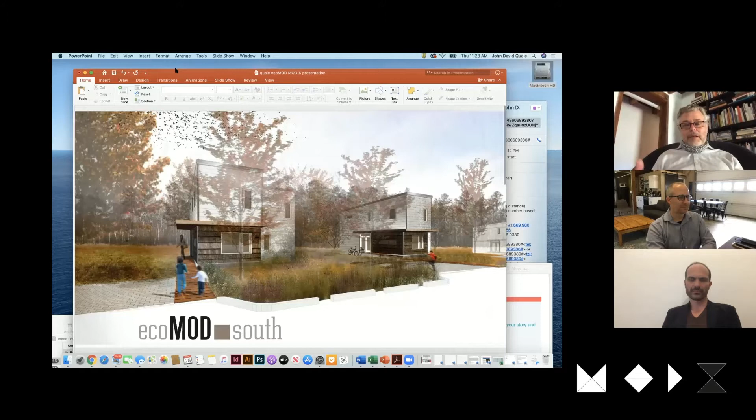We also did a project where we were focusing on taking that EcoMod 4 home and adapting it to 2 different locations. Those were the renderings - that's what the houses looked like when I last saw them right before I moved to New Mexico. It won one of those awards in Architect Magazine, and we thought that's great. There's some interior views real quick.

The main thing is that we really focused on airflow and ventilation, trying to address that this is the southern part of Virginia where it's a lot more humid. It was difficult to do some of that analysis because at the same time we wanted the house to be exactly the same as the one up in the mountains.

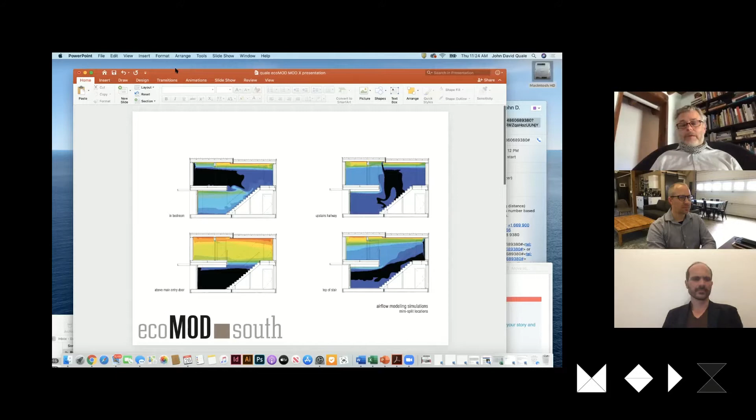So we got a passive house consultant to work with us on that, and she did a fantastic job. We were able to make it work - it involved the window placements more than anything else. Here's some examples that came out of that analysis, showing how she had to turn the buildings in slightly different ways so it was possible to meet Passive House Standard.

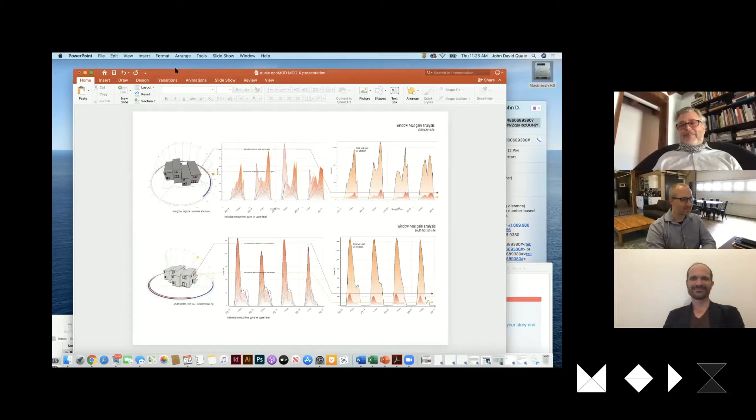Not only did we get the Passive House Standard, but that consultant also got an award for the rigor of her analysis from PHIUS, the Passive House Standard group in the US. She had worked for the guy who started the Passive House Standard in Germany - she was a grad student there, and she's great. I still stay in touch with her. Real quick, this is us doing those homes that were multiples.

The 3 homes, 2 passive house, and 1 just basic standard construction. We had intensive meetings—when you're doing modular, it's not easy to do Passive House Standard, and this team took it on. When I first got involved, I thought there's no way these guys are going to know what they're doing. But they totally got it, understood it completely. That's another learning opportunity for me. I always felt that's what I want to be doing at all times, learning something new.

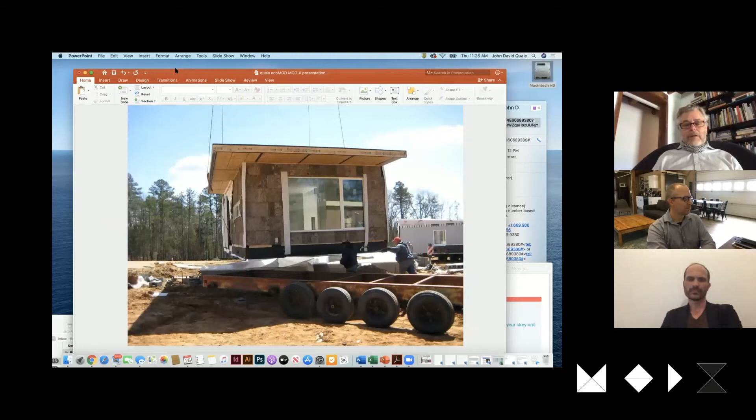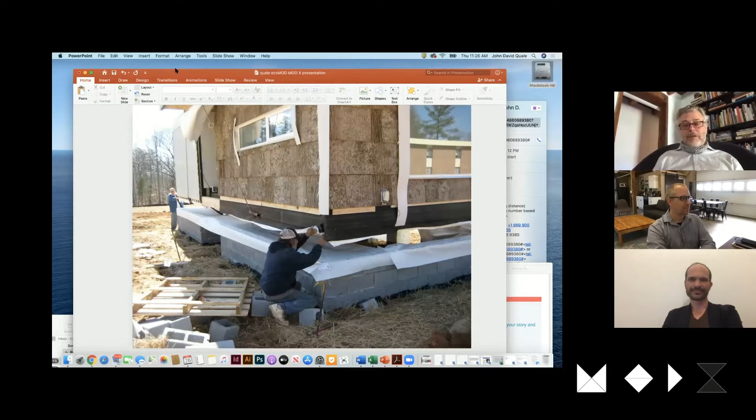There they are going on the trailer, being placed down. This was the most complex moment—that thing was hanging in the air a foot off the foundation because of little odd things that kept happening as we tried to put it down, because of the Passive House Standard. It ended up being a good thing though. We got some poplar bark as part of the facade of the building.

Everything had to be fully accessible, meaning it was 2 stories, but there was a fully accessible bedroom on the lower level. We had to increase the size of that home from the earlier version of it.

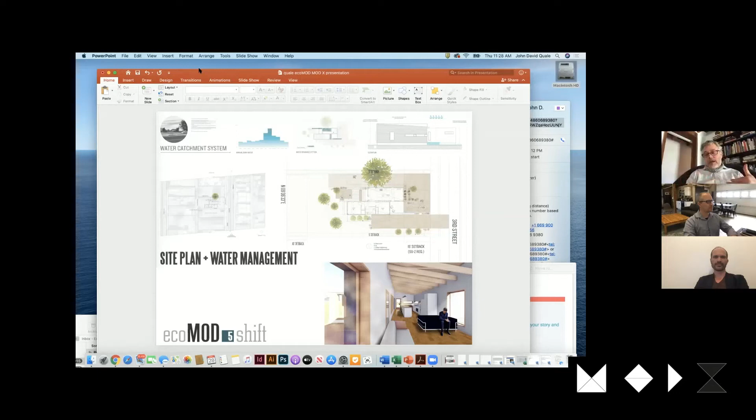The main focus was on water management and the site, because the weather is actually pretty extreme here—like I said earlier, high elevation and all of that. We tried to get as many breezes as we could through the building, and we were also collecting water on the roof in a diagonal line across it. That's what that weird structure up there is for—it forms this folded roof to take the water diagonally to the far corner.

The last one that was completed is EcoMod Rise. This was with the local community college—we ended up working with them because they had great building trades. But they didn't treat us very well. The people who managed the financial side of the community college were pretty obnoxious to our students, unfortunately, so I don't plan on working with them again.

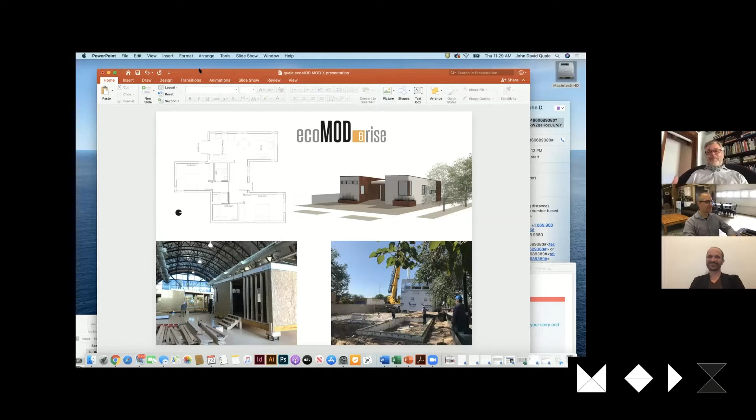That rendering is what we aspired to, and I won't show you the picture of how it turned out. The students and the people at CNM kind of took it over, and that team—it's very fresh in my mind because this is somewhat recent. I was pissed off, I was really pissed off. I won't go into that beyond that.

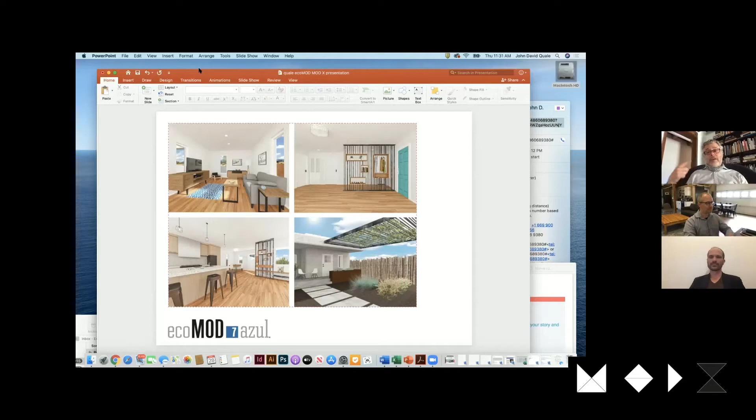We're doing a home that is still not completed because we had to stop construction in March. This fall I'll be doing a seminar to finish that construction, and we'll be getting students in there to finish this off. Some of them were 4th-year students, and a lot of them are returning into the grad program, so I'm hoping I'll get some of the same people.

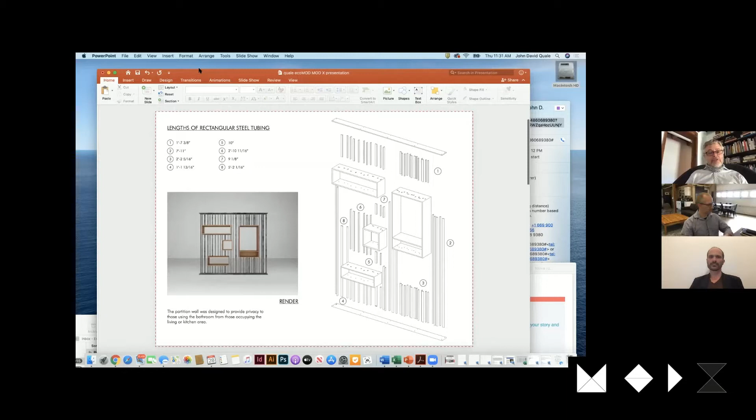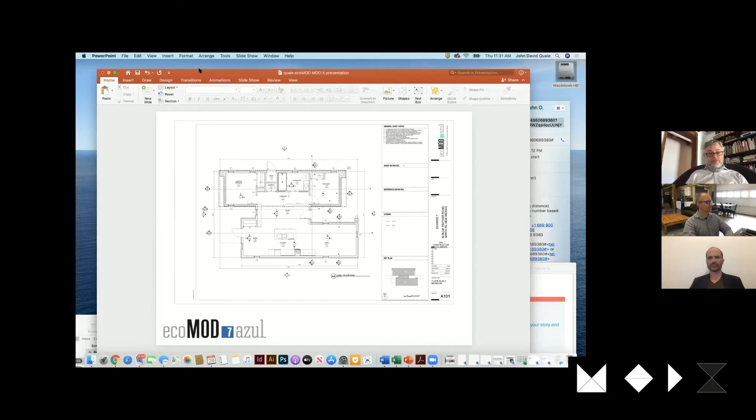Here's some other quick images, a really interesting little design, a partition—they were a brilliant team. There's the floor plan, pretty straightforward, very, very small. We had to go through the HOA process and all of that, which is great learning for our students to do. I actually tasked it to one of the smarter students, who's really, really excited about this idea.

Oh, that was an out of sequence image there.

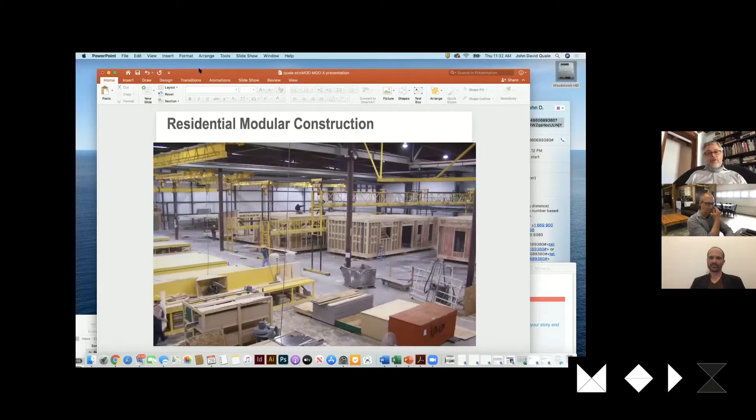Dealing with residential modular construction, one of the things I started to do when I visited plants was gather data from those companies when I could. In some cases they would not give any data, and other times we could get some decent information, but they said it had to be private—it could only be used for determining results, not have people know where they got those results from.

And, you all know this kind of stuff. You know what these things are.

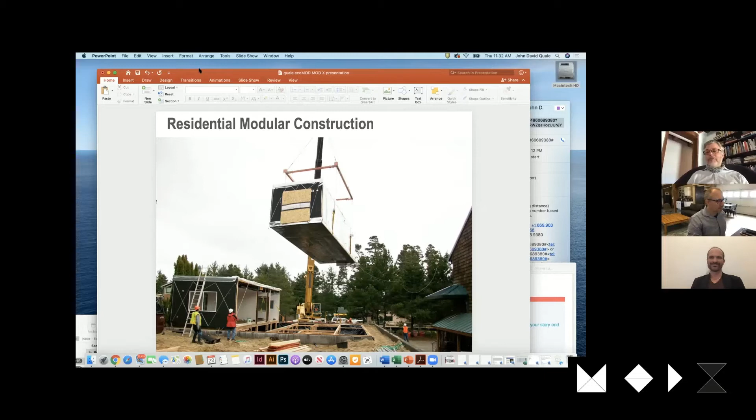Ultimately, in 2011, I worked with a team: myself, Matthew Eckelman, who's now at Northeastern, and Kyle Williams, who went to Stanford. I don't know what happened after that. And Julie Zimmerman, who's still at Yale, was a colleague of mine at UVA, in the sense that she was in civil engineering and I was in architecture, and we got to know each other.

And Greg Sloditskie has been really at the core of all of this, because Greg's just Greg. I get emails from him at least once a week, random things, maybe not about modular at all. You probably all are shaking your head, getting the same thing. But he's a wonderful guy, and I feel very lucky because he loves EcoMod, so he will fly to New Mexico, he would fly anywhere, for EcoMod. He just thinks it's such a great scenario, which I think is fun.

So there were basically two papers that came out of this. The Construction Matters one, which I'm happy to share when you distribute this. These two papers, I'd be happy to share those. And I also have a paper.

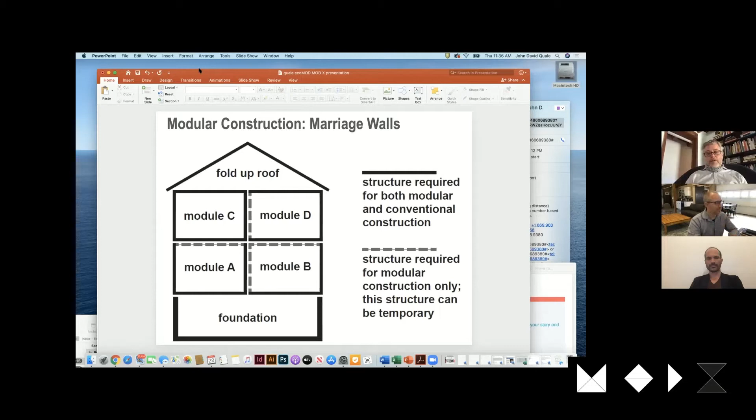And so the other thing is, with modular construction, you inherently have connections. You need to have modules, which means that you are kind of duplicating some structure compared to a conventional building. So one of the cases we tried to make was, you put in a temporary wall, and that's what the dashed lines are. You can take away that structure once you attach it properly. And with pictures of that, these are always useful when I show the students, because they're like, wow, that's a lot of wood there. I'm like, yeah, but it's a building.

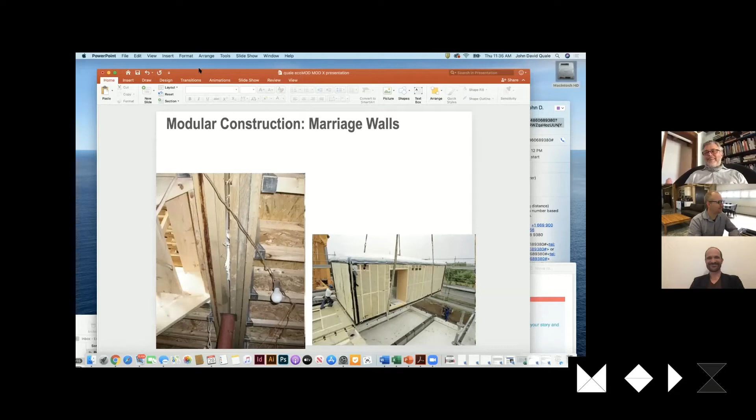And these were single family homes, so then I went around to single family home builders who were sustainably oriented, and tried to get the same kind of data from them. That's basically driving to Home Depot 3 times a day, because they're pickup truck contractors, and those kinds of things, where they were shocked when I showed them the information and did the comparison. We wanted to get more, I think we only had about 4 or 5 that we got from the sampling. It was shocking, because I honestly did not think this is how this was going to turn out.

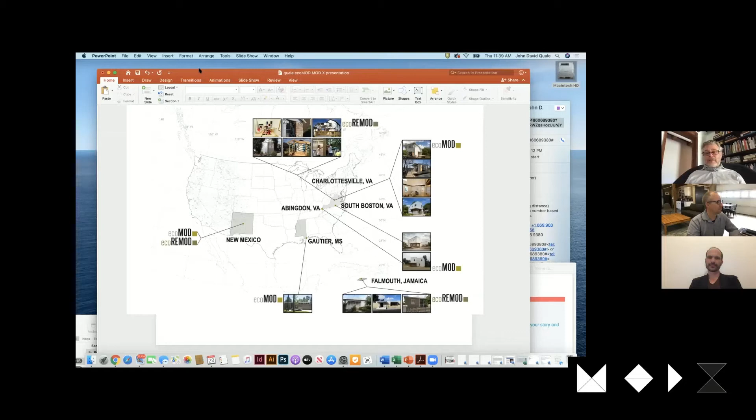Lots of places. We've actually done some rehab, eco remodeling as we call it, but that's not necessarily relevant for this topic. We ended up pursuing a variety of topics and ways of thinking about these things, and you saw that already. This is the whole partnership where we did the three homes built to passive house standard, and that's pretty much it.

We can kind of go into the conversation now. That'd be good.

Well, thanks a lot, John. That was a really eye-opening presentation, particularly the data at the end. I had a quick follow-up question about the single family data, where the difference is so big. Do you think it's because single family modular has been around longer, so there's more optimization, more scale? The multifamily numbers are better too, but it's shockingly better with single family. Do you have any hunches?

Well, that was actually something Julie and I talked about, and we were a little bit worried about it. We dug back into the data, and I'm not a big data guy myself. I try to lay out strategies and ideas about how to gather data, and I find someone who's really great with an Excel spreadsheet. That's all it takes.